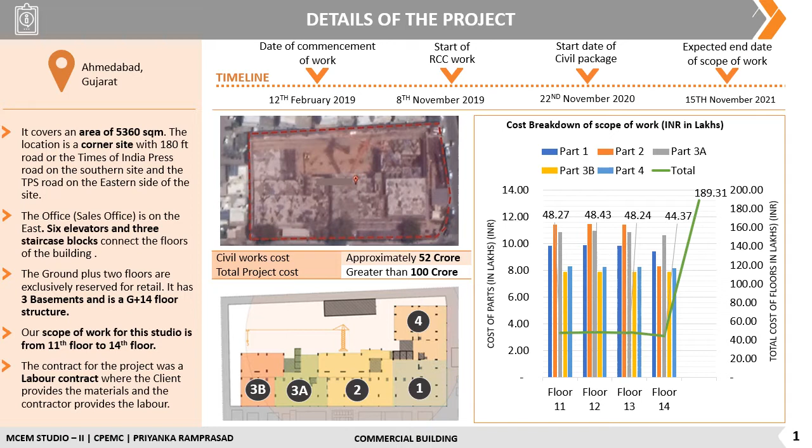The site layout was modeled on Revit, a BIM software, to show the progress on site at that point of time. The structures on construction site were identified, areas were marked, and total cost of material takeoff were derived. As shown, the total cost for setting up the construction site structures came up to 32 lakhs.

Path of travel analysis was done to identify the benefits of suggested relocation of steel yard, QA/QC lab, and cube curing pond. The sample cube is taken from the cube curing pond to the QA/QC lab, that is almost 100 meters away from the pond. The distance takes more than a minute to traverse and compromises the quality of the cube due to unnecessary changes of testing conditions. Putting them together solves the problem.

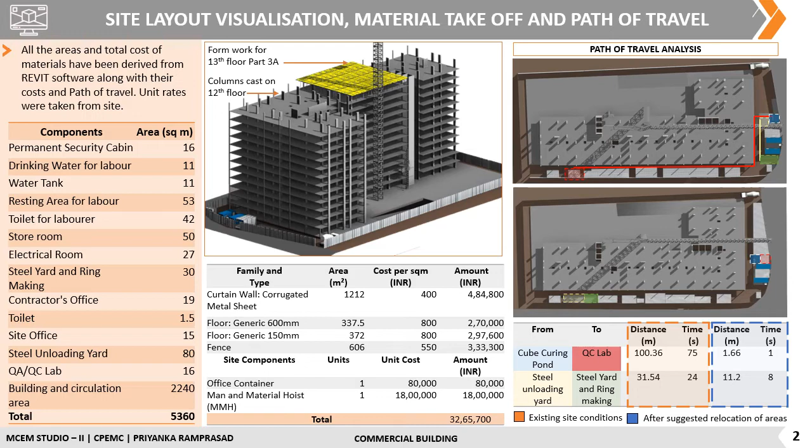The steel unloading area is 31 meters away from the ring making area. This costs in terms of time and increases safety concerns due to the unnecessary movement of steel across common circulation area. Locating them next to each other reduces these concerns. The path of travel was calculated in Revit software.

The total quantity of steel required for the scope of work, that is 11 to 14 floor, was calculated. The steel coefficient obtained from site engineers were 150 kg per cubic meter for slab and 200 for columns. The cost of purchase of steel for the scope of work includes that of binding wires.

The month-wise steel requirement was calculated and steel required in January was found to be the highest at 126 metric ton. Using the observed productivity, it was calculated that 35 laborers were required every day for that month. The area required for stacking peak quantity was found to be 65 square meter, which is less than the 80 square meter provided. Hence, the steel can be adequately stocked.

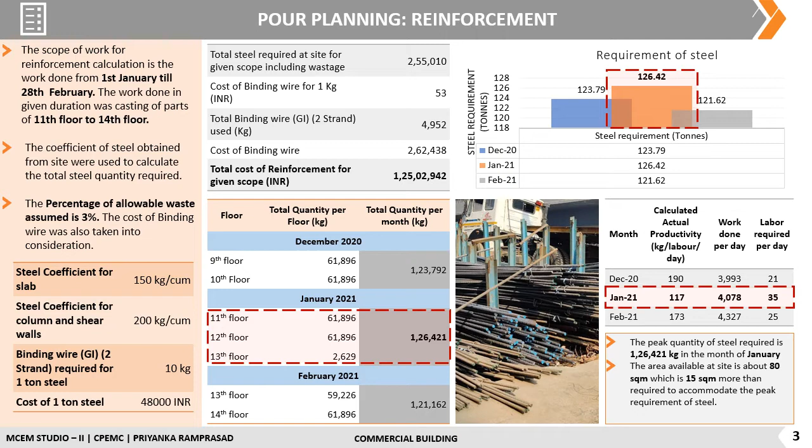The project, as mentioned before, is being done on a labor contract. An item rate contract was proposed for the project, which was formulated taking the General Conditions of Contract 2020 by CPWD and Gujarat State Forest Department's Item Rate Tender and Contract for Works as reference. 18 General Conditions of Contract and 11 Special Conditions of Contract were proposed. The contract was then analyzed with respect to FIDIC Red Book.

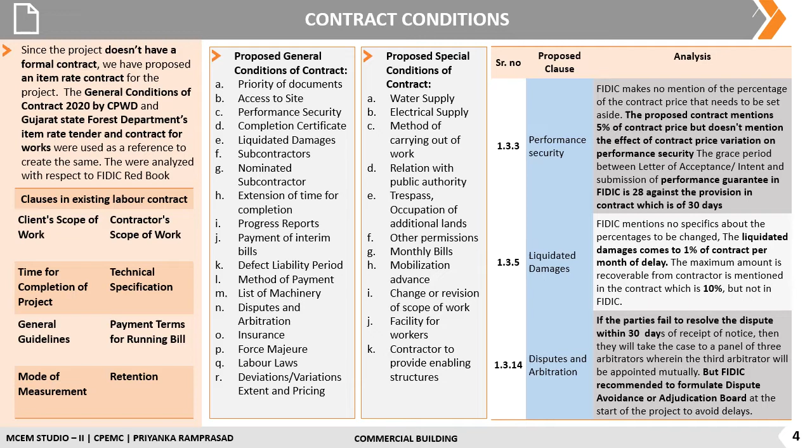In linear responsibility chart or LRC, the rows represent parameters involved in the aspect of quality. The columns indicate the project personnel and numbers indicate the degree of authority and responsibility which exists between the rows and columns of LRC. The matrix thus depicts responsibility that each project participant will play in different aspects of quality. Some of the 28 parameters have been shown on the slide.

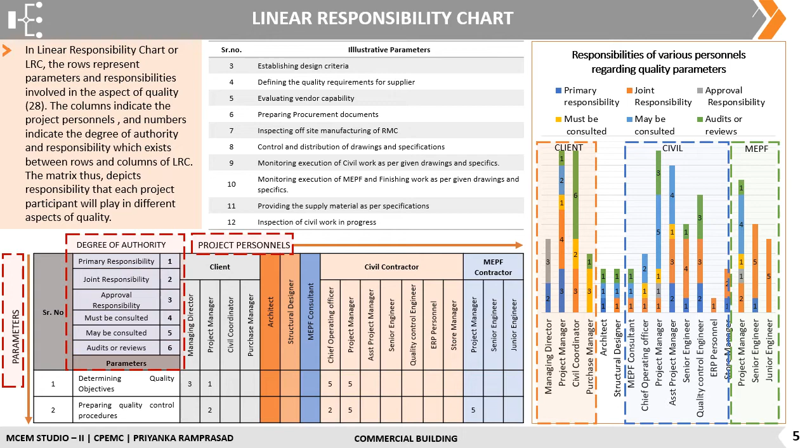After creating the chart, it was found that the highest responsibility for quality lies with the project manager and civil coordinator from the client's organization. The second highest is the civil project manager, followed by assistant project manager and quality control engineer from the contractor side.

Job hazard analysis was done as a part of the safety management exercise. The four main types of hazards identified as per OSHA are fall hazard, struck by, caught in between, and electrical shocks. One of the electrical hazards identified on the site was shock by electrical wire in contact with water, which can cause equipment damage, burn, shock, and electrocution.

The control measures present on site were listed and the engineering, administrative, and PPE controls were identified. One of the suggested measures was hooking the wire above the ground as being done elsewhere at the site. This can be seen in the photo shown below.

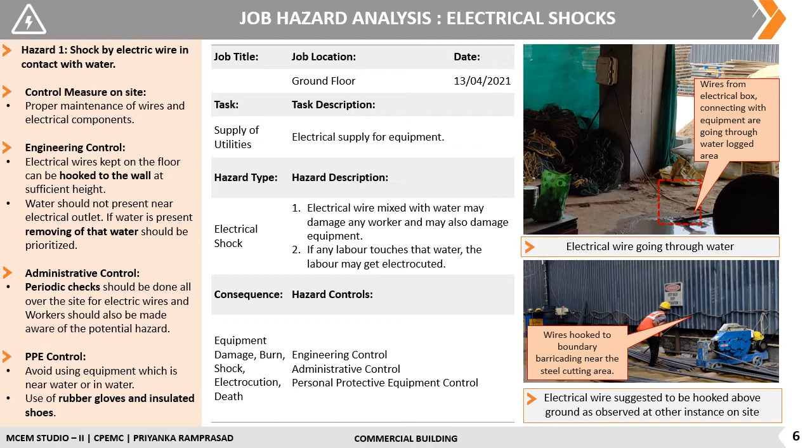The Foreman Delay Survey is a qualitative and quantitative tool for measuring efficiency and improving the productivity of the laborer. The plastering activity was observed for 2 hours 40 minutes and has been divided into time slots of 10 minutes each. The parts in the blue on the plan were worked by Mason M1 and the ones in red by

Mason M2. Supportive delays are the delays caused by activities that support the main work happening, and the recoverable delays are the ones that can be avoided, reduced, or eliminated. The delays have been categorized and listed. The photo shows the 4 workers who were being observed.

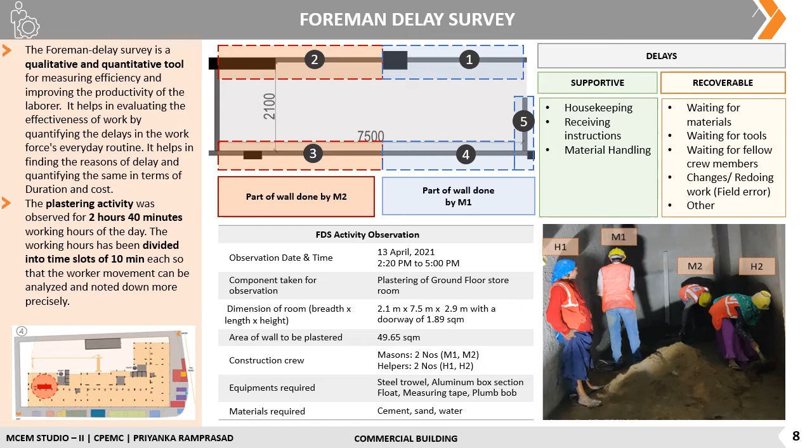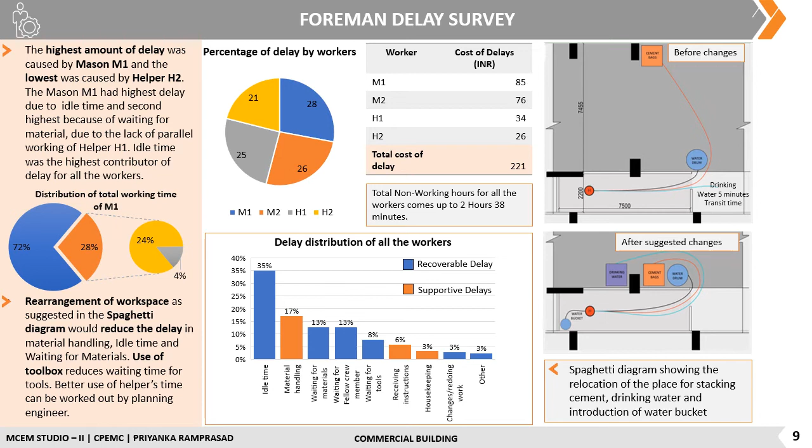The cement and sand and drinking water have been suggested to be moved close to the room. A water bucket can be placed in the room to reduce the unnecessary movement of the helpers. From site layout, visualization, area, and material takeoff, we learned that the use of BIM software leads to more efficient working. It helps in better visualization of site, deriving the cost of materials, and getting the area.

There was considerable reduction in time after relocation of certain areas. This could be quantified using the path of travel analysis. In pour planning, the total amount of steel for the scope of work was calculated and found to be 255 metric ton. The cost of steel for the scope of work was 1 crore 25 lakh. The peak amount of steel required is 126 metric ton for the month of January. The area for stacking the bars at peak requirement was calculated and given area was found to be adequate.

In contract conditions, an item rate contract was suggested and the necessary general and special conditions of contract were included. Analyzing it with FIDIC Red Book helped us know the standards of contract and realize the pluses and shortcomings of the proposed contract. In linear responsibility chart, we learn the responsibilities of various personnel at site with respect to quality. It was found that the project manager from client side shouldered the highest responsibility.

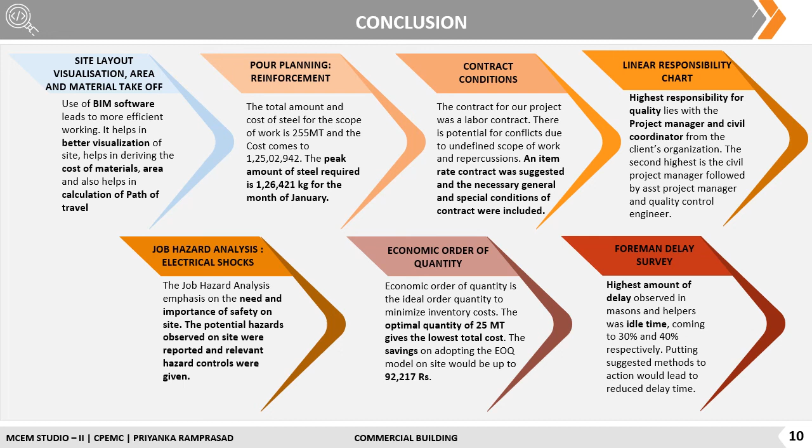Adopting economic order of quantity helped us find the ideal order quantity for reinforcement at site. Foreman delay was a lean concept which helped us qualitatively and quantitatively analyze the construction crew's activity of plastering, and measures were suggested to increase efficiency.